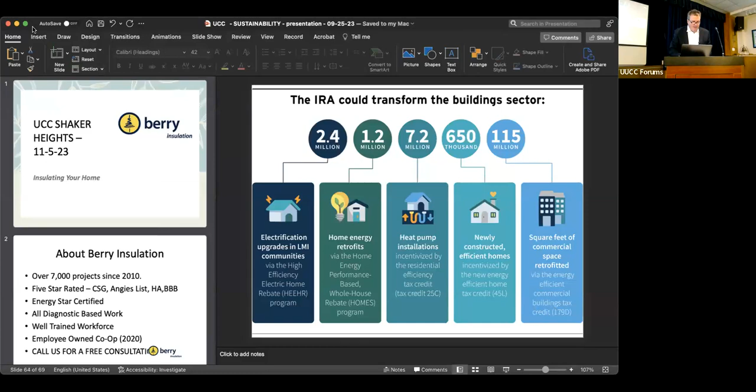So I want to get this to the full screen. Let's see what we can do. Okay. That's right. And I'm very impressed with the technology setup you have here.

So, what I'm going to talk about today is how to keep your home safe, comfortable, and efficient. I'm going to buzz through a number of things you can do in your home to affect your situation, safety, comfort, and efficiency. And then also I'll hit on some areas where you can help defray the cost of energy efficiency improvements, and then Alberto will amplify that, I think, in his presentation. Okay, so write down your questions. There's a lot of content in this subject, and if you have questions about anything we discuss, I have a lot of photos and slides we can review. I would certainly entertain those in the Q&A period or even after.

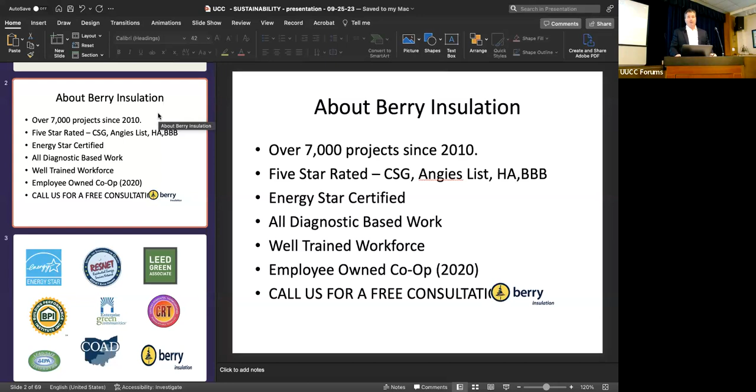Okay, so a little bit about our company. We've done approximately 7,000 projects in our history, anywhere from small improvements to a home up to larger commercial buildings. And as you said, we're involved in a lot of different programs around the area, and we're fairly credentialed. Our men are really well trained. We have certifications in a number of different areas. We're an Energy Star certified company, RESNET certified. There's a lot of credentialing that our folks have, so when they come to someone's house, you're confident that they know what they're doing.

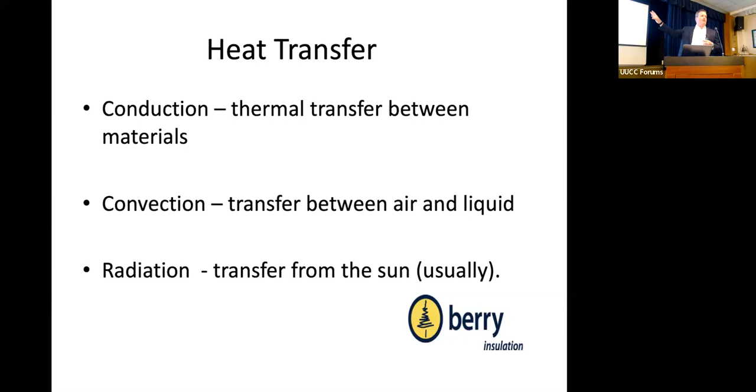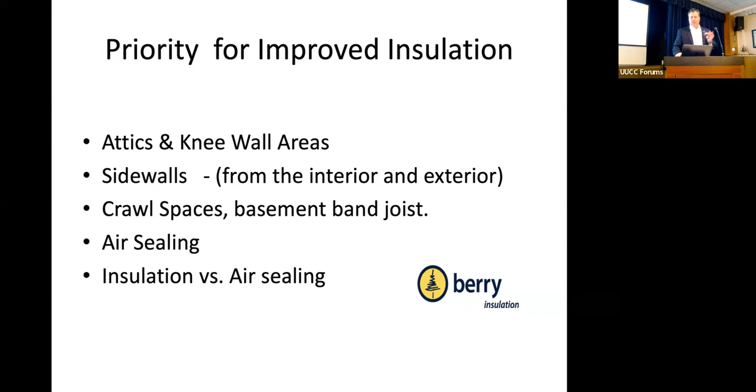People always ask us, well, what can I do to my house? What's the priority? What should I do first? And it all depends, of course, but the common areas for improved insulation in a home are attics and knee walls, which are the areas, well, some photos here in a moment, areas behind walls on your third floor, maybe. Side walls, the exterior walls of the home can be affected through insulation, crawl spaces and basements, and then air sealing. We'll talk about air sealing in a moment. And then we'll talk about what is air sealing versus insulation, okay?

When you walk into a Home Depot or Lowe's or you're getting a remodel done on your house, everyone talks about R value. What's an R value? If you ever go down a Home Depot aisle, you'll see this R19, R13, R40. So R value is a measure of the resistance of any material to the transfer of heat. Very simply, this podium has an R value, that table has an R value, and insulation has an R value. And the higher the R value, the better that material is at stopping the conduction of heat or cold. Okay? So the higher the R value, the better.

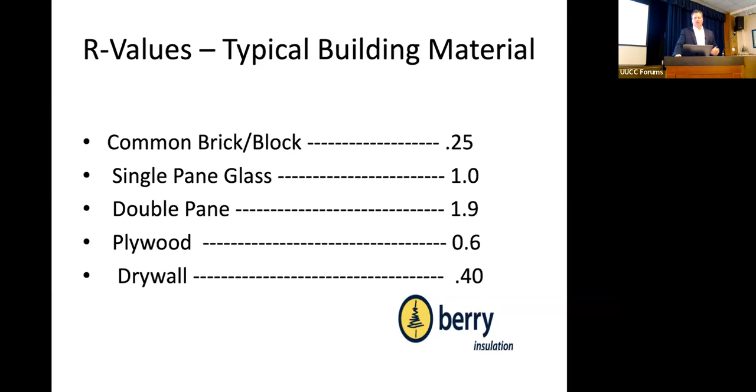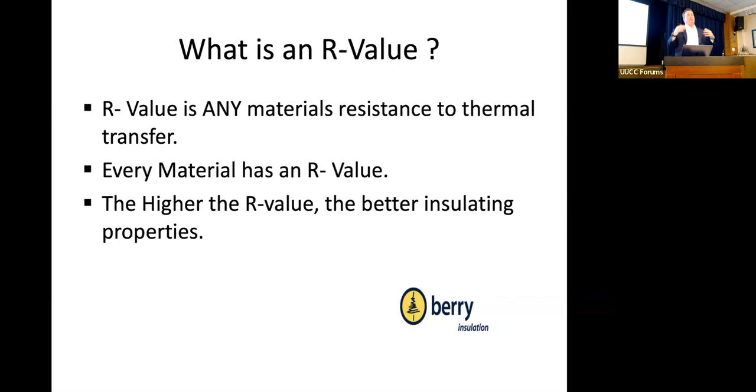So typical R values for building materials: brick, cinder block is very low. It's very poor, a very good conductor of heat, a poor insulator. Single pane glass has an R value of 1 or less, plywood 0.6. And then you get into walls, like wall insulation might have an R value of 13, attic 49. So that's what R value is, okay? Because that always comes up. People call up and say, hey, what R value should I put on my house? So, well, it depends on where it is and what the application is, okay?

Fiberglass has an R value of 3.8 per inch. So if you have 4 inches, it's 3.8 times 4. Cellulose is a similar material. Mineral fiber is a little higher. Foam, which you read a lot about and hear a lot about in advertising, has a very high R value per inch. So that makes it a good insulator. You get more bang per inch with certain types of foam than other materials. But there's also a cost trade-off in those things, okay?

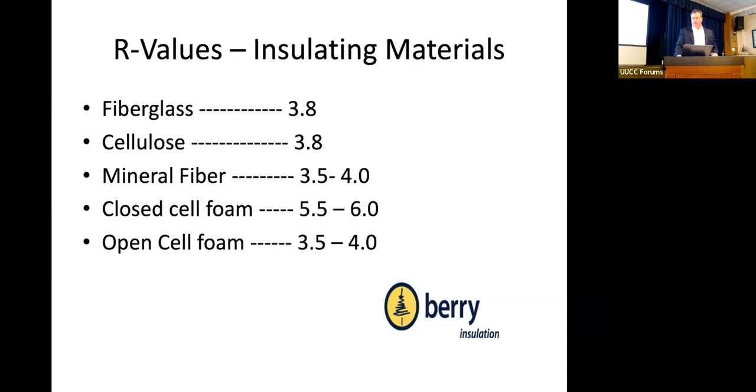So where do you start? When people call, they say, my house is cold, I have ice dams, I have the second floor that's hotter than the first floor, I have a sunroom that I can't use. Where does one begin? And we always like to begin all of our projects with some sort of diagnostic approach.

So that could be as simple as a visual observation up to and including a complete energy audit of your home. Okay? So on the far end of the spectrum, there's something called a HERS rating, which is primarily used in new homes, at least in Ohio. It's called a home energy rating system, where we or someone else could develop a very detailed predictive energy model of your house. So we look at the house and measure the doors, the windows, the walls, the attic, basement, the type of furnace you have, the efficiency of the air conditioner, the lighting, and the appliances.

You put all that together in a fairly sophisticated computerized model, and we can predict what your energy costs are, and we can also predict when certain improvements are made, how much it's going to impact your costs and your efficiency, okay? That's primarily used in new construction when you are making choices about different types of windows, different efficiencies on furnaces and air conditioners, maybe even solar panels. And then what spits out of that also is a number.

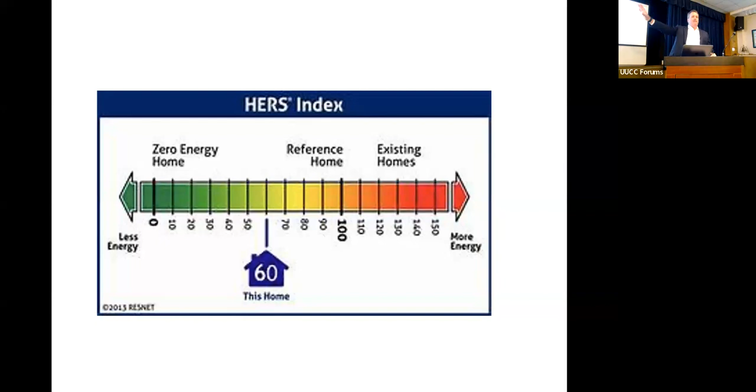There are some states around the country right now, about 8 or 9, Massachusetts, Texas, California, and a few others, that require a HERS index every time a title transfers. So you're providing the consumer with clear information on what the energy costs of that home are. In our state, it's not required except for certain programs where you're getting a rebate perhaps from your utility company, or in the city of Cleveland, every rehab or new home requires a HERS rating for a 15-year tax abatement. So that's the far end of an energy audit. That's more complicated, more expensive.

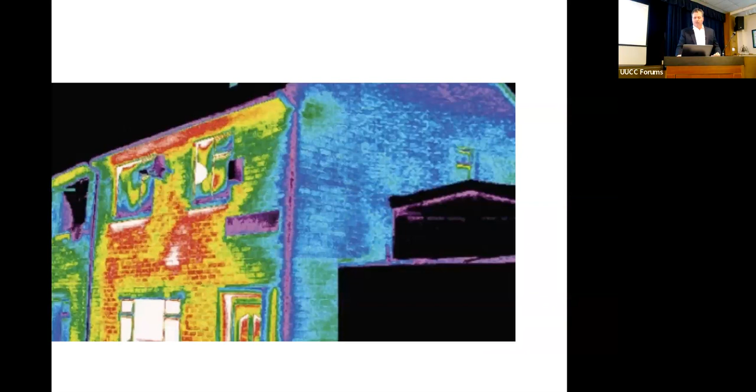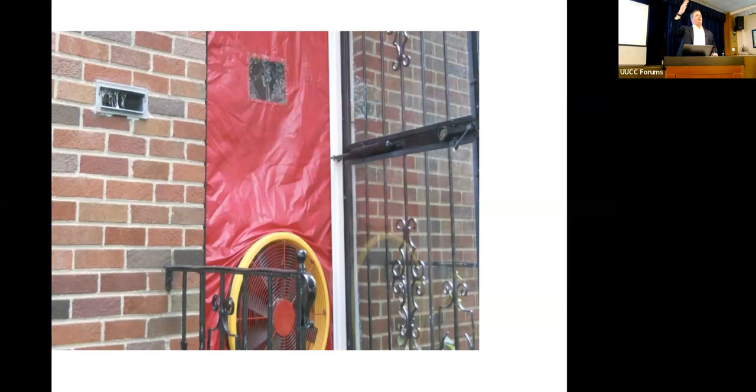We put a little computer, I think I have a photo of that. I'll get to that in a moment. You can put a computer on this fan, and we can measure the cubic feet per minute of leakage in your house. So if this were your house, and we put this fan on the door, we could suck the air out, and the leakier this box is, the more air changes per hour you're going to get. So let's say it's 4,000. And then we can identify areas of air leakage, under-insulated areas, and make improvements. Okay, I'm going to insulate my attic. I'm going to seal up the windows. I'm going to insulate my crawl space.

We can do a post test and demonstrate the reduction of air leakage with an objective number, and quantify that and demonstrate to our customers, which makes us feel good, that the money you spent to make this investment improved your air leakage by 30% or 40%, whatever the case might be. And that reduction of air leakage through this simple diagnostic test has a fairly high correlation with your energy costs. Okay? We've done thousands of these tests. It's not unusual to get a 20, 30, 40, 60% improvement depending on where you start and depending on which measures you implement. So that's a very simple diagnostic test.

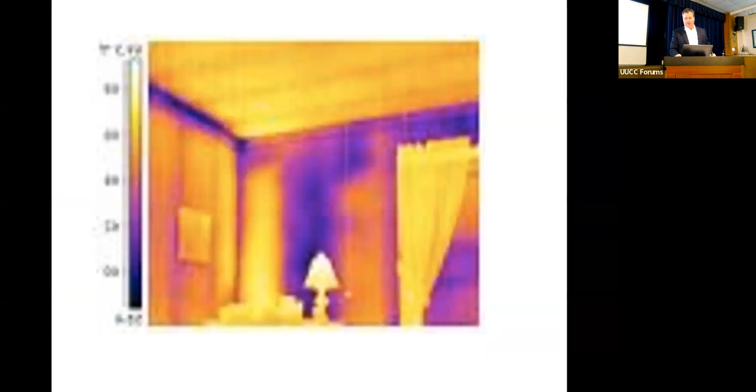Used in conjunction with an infrared camera, usually that's sufficient for most residential homes. And for example, this house, we did an infrared scan when it's under pressure, and we could see the leakages in the sidewall. This house has a whole side of the house that's uninsulated. And we're looking for these elements: air leakage that comes from wind, conduction of heat, and so forth.

In addition to the pressure test and infrared test, we also perform, and we highly recommend, this is the safety part of our business, doing checks for carbon monoxide leaks, natural gas leaks, water intrusion, things like that.

Because when you take an existing home that's been around for a long time, and in Shaker, the homes are very beautiful and also very old, and you dramatically change the air infiltration, you can negatively affect the safety of the home through carbon monoxide backdrafting, improper venting that could lead to mold or reduce indoor air quality. So the safety part is important. Efficiency is great, comfort's great, but safety is equally important.

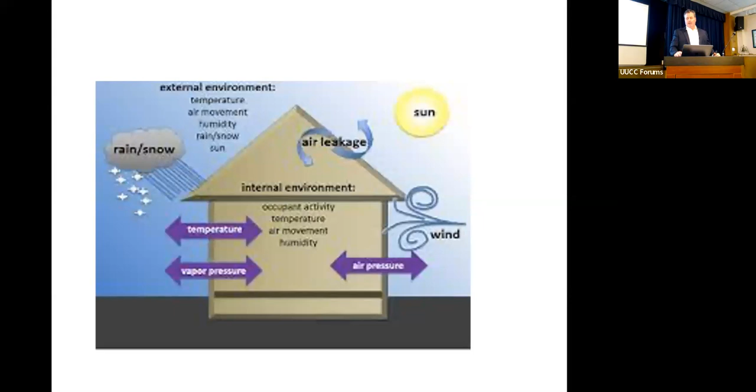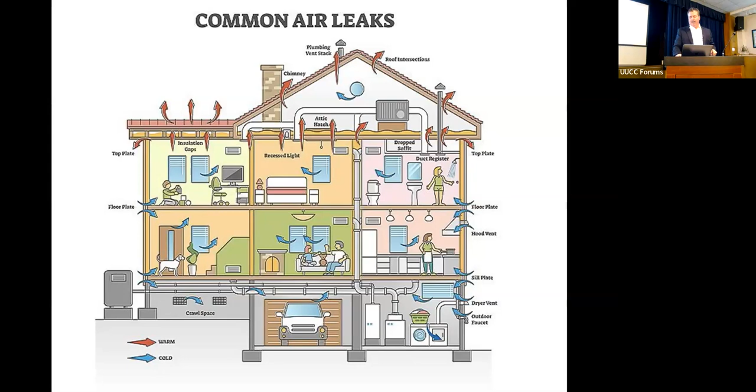And these are some diagrams to show where you get air leakage in your house. So most houses, less so in Shaker, have forced air furnaces that generate pressure in the house, and there's a lot of leakage out of the house. So sealing leaks is the highest priority and lowest cost thing you can do. Caulking windows, doors, blocking leaks in attics, basements, and so forth.

So after you do some basic diagnostics, whether you do the HERS rating on the far end or a pressure test, or even just visual observation, you have to come up with a plan on what makes sense economically and what you can afford and what has a big impact on your home.

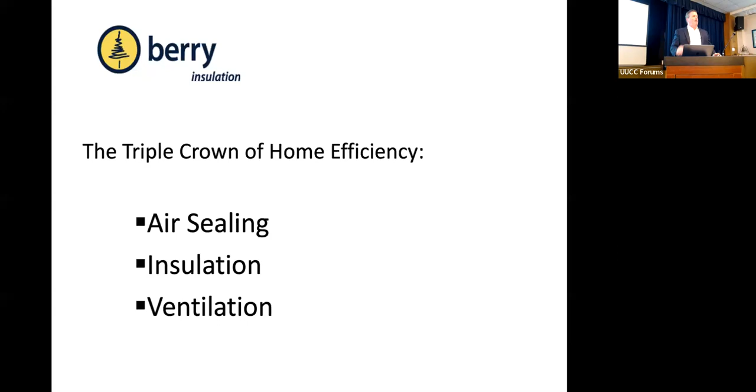And there's three things that if you leave here remembering nothing more, it's these three things that'll affect the safety, comfort, and efficiency of your home. And that's air sealing, insulation, and ventilation. And those three are done in conjunction. You can make some impact on your home to address those areas.

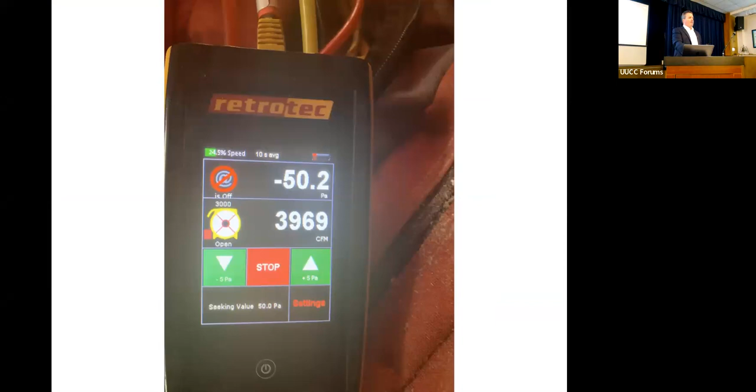If you don't have good ventilation, you end up with this, mold in your attic. If your bath fan's not terminated to the exterior, you can get mold. This slide's a little out of order, but this is a device where we connect to that fan and measure the leakage in the house. So this particular house has a leakage of almost 4,000 cubic feet per minute. And then we do a post test, okay?

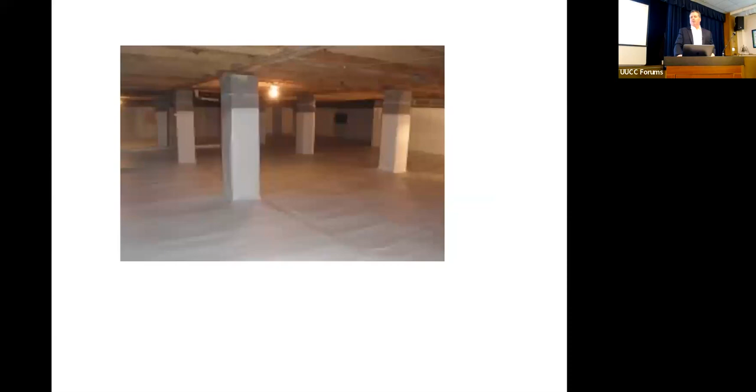Crawl spaces are a problem. Many of the houses in Shaker have crawl spaces. So you can insulate and air seal crawl spaces, basement walls. This is a bath fan that was not terminated to the exterior, and the attic was insulated, and you're pumping steam up in your attic and you get condensation and mold.

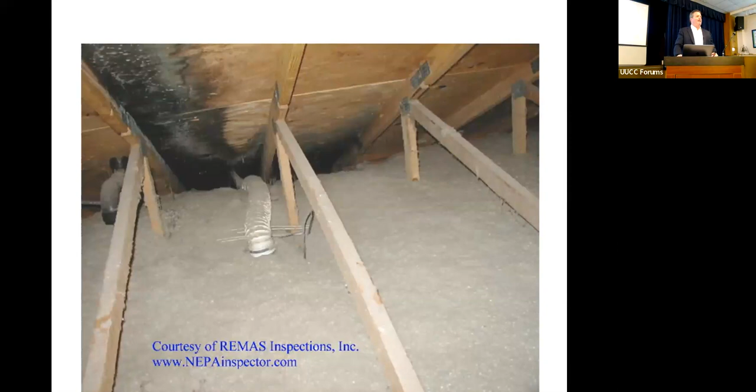And I bet we get 2 or 3 calls a month from people with this condition. Sometimes they don't know about it until the house is being sold, or they go up in the attic and, oh my gosh, I have mold in my attic, and that's not good for health and indoor air quality.

Attic insulation, this looks like it could be a Shaker home. If you go stick your head up in your attic and the insulation is below the rafters, it's probably not enough. If a home were built today in Shaker or in the state of Ohio, the building code requires 14 inches of fiberglass or cellulose in your attic. And very few houses have that unless they've been retrofitted. That code in 2010, it was 6 inches.

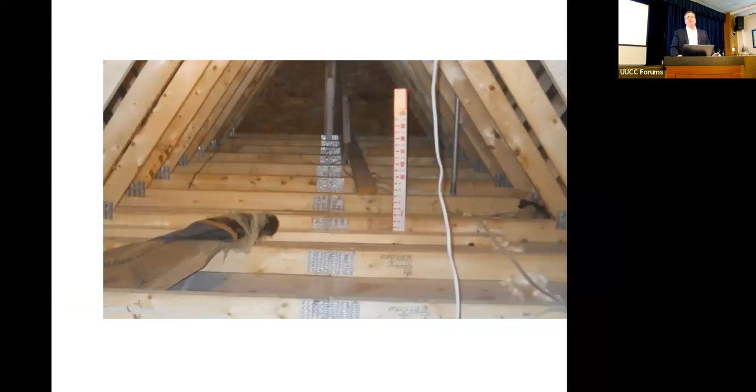Okay, so in your attic, in many cases, you could double, triple, or quadruple the amount of insulation at a relatively low cost. And that's pretty simple to do.

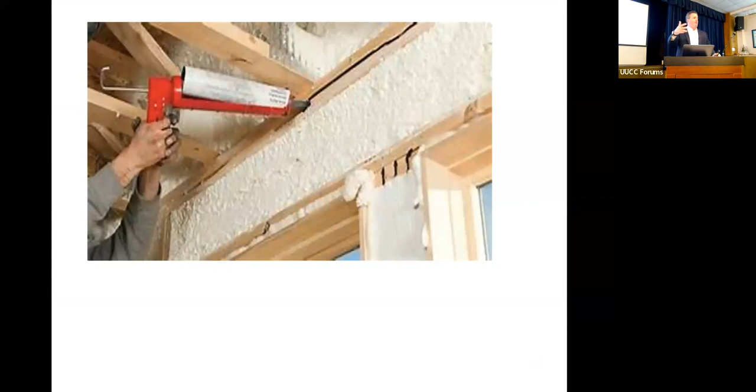Just going to buzz through some photos and let's talk about air sealing. So air sealing is exactly that. Anywhere there's leaks of air from inside to out, that's convective transfer of heat. We talked about conductive. This is convective, where the wind is pushing air into the home, cold air in the winter, hot air in the summer. If you have mice in your home, that's probably a sign you have air leakage. People call us with mice issues, and when we air seal the home for the benefit of improving your efficiency, you also address pest issues too.

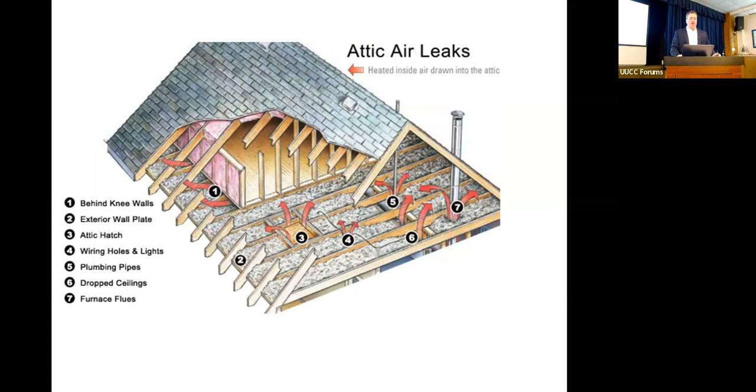These are common air leakages in attics: hatches that are uninsulated, flue pipes from furnaces, can lights, knee walls, all those areas, okay? And this is how you air seal an attic. All these little penetrations get sealed up with foam or caulk, can lights. So that's attic air sealing. And you can also affect the sidewalls of a house.

In Ohio, before 1975, it wasn't required by building code that you have any insulation in your home. So right off the bat, if we see a house that was built before that, we're looking to see if they made any upgrades, and then the codes have evolved since then.

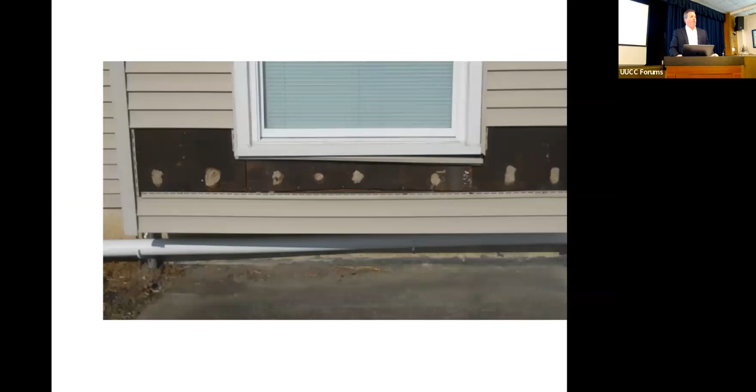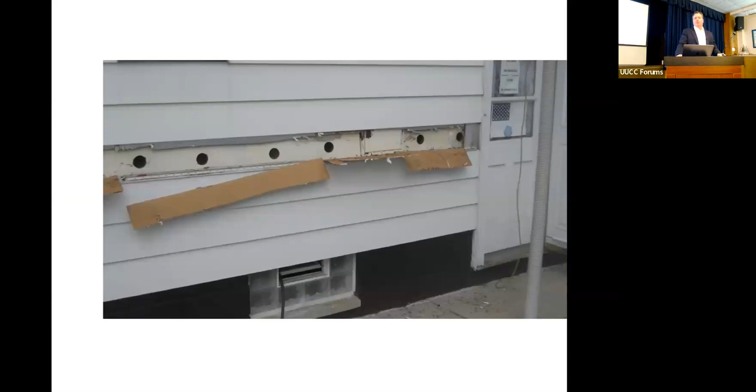So on sidewalls, this is a house with vinyl siding. You just remove the siding, drill holes in each wall cavity, and then fill the holes with insulation. It could be fiberglass or cellulose, depending on your preference or what is called for. And then put the siding back, and you kind of wrap the house in a big blanket.

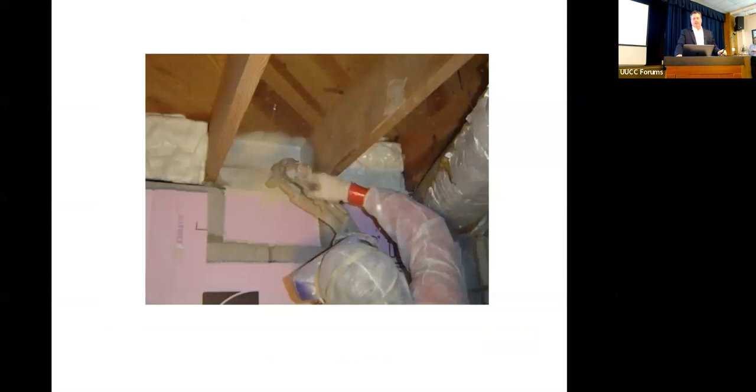It sounds a little invasive, and it's like one of those things, you want to eat the sausage, not see it made. But it can be done in a day or two, and without any damage or long-term effects on your house. If you have a brick house with a wall cavity, you can also drill from the interior, which we do a lot, which is also part of the issue. So sealing up the basement's important. Glass block windows, replacing those are important.

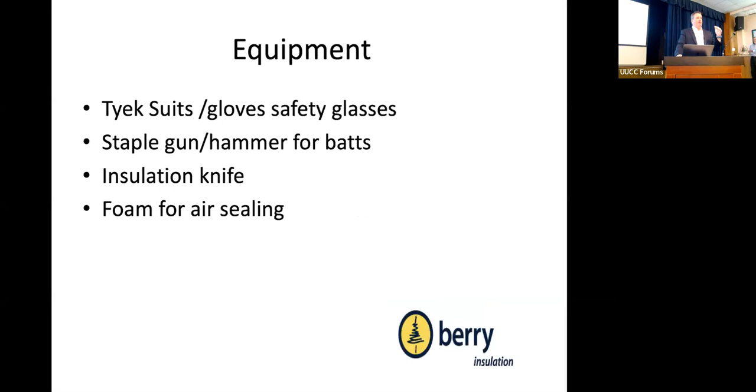And then what Alberto is going to talk about are some ways to pay for this. Dominion Energy has a program that can offer up to $1,250 rebates. There's a federal tax credit. There's some loans that have lower interest, financing for energy improvements, and there's a low-income weatherization program. If you're a senior on fixed income, we're connected with that program in Cuyahoga County.

So that's a quick tour through a fairly complicated subject, and I'll be happy to entertain questions when Alberto is complete with his presentation.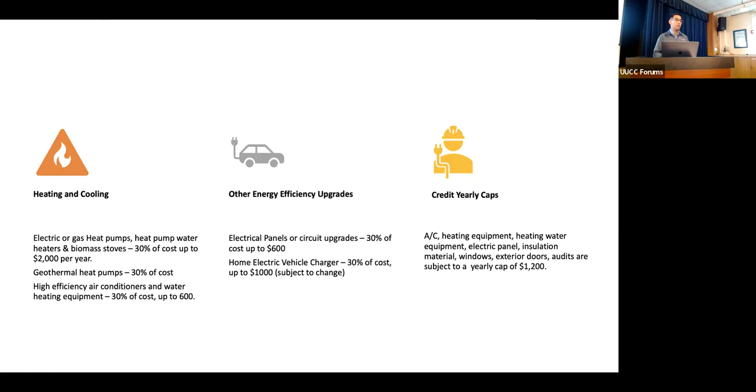And also, as Berry explained, there are programs for senior citizens as well as low income, other ways for it to actually pay up to $14,000 for repairs, which is a nice number if you're looking at heat pumps. A heat pump can run you, depending on your house, from $8,000 up to $20,000 if you want all the bells and whistles on a heat pump.

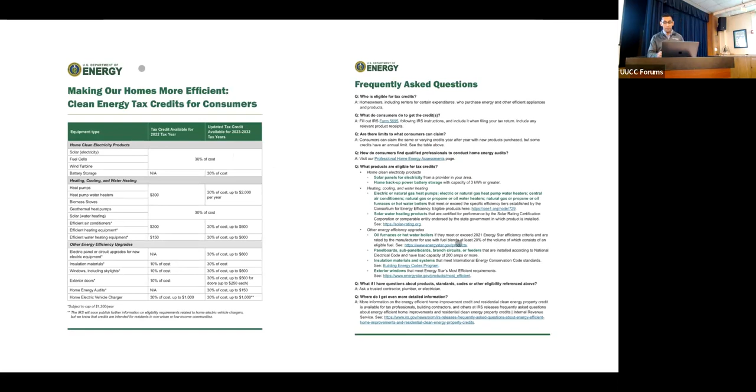So I'm adding this just as a quick little snapshot of what the Department of Energy puts together, and it gives you a quick story, so you'll be able to look at this later on in the reporting, and some common questions in regards to which form to use when you're applying for your tax credit. And you should always speak to your tax consultant. So I've gone over the credits, and I know this is very quick.

In our opinion, with the Shaker Heights Sustainability Energy Subcommittee, you should start from the envelope, right? So caulk around all your windows. And some of these are DIY projects, right? So caulk your windows, your envelopes, any opening penetrations. Install any door sweeps. Myself included, last year I was able to walk through some of my doors and feel the draft, right? So just installing a door sweep could limit that.

Having an 1/8-inch gap below your door provides a similar air intake to your house, or loss of heat, better said, as having a 2.5-inch hole on the side of your house. So just think about it that way. 1/8-inch gap is very little, and you feel it. You feel that cold or the hot. So locate cold and hot rooms.

Shaker specifically has a lot of old homes, as Mr. Berry alluded to, and one of the things that we don't have is proper insulation on these homes. Our duct systems are more of a C channel, and they're using the back of the front of the wall, depending on how you look at it, to complete that duct. And the duct's not insulated, so you're actually heating your facade. If you do a thermal image, you'll see that. And as soon as your AC goes off, you get the cold draft because now you're getting all the cold air. So look at things like that.

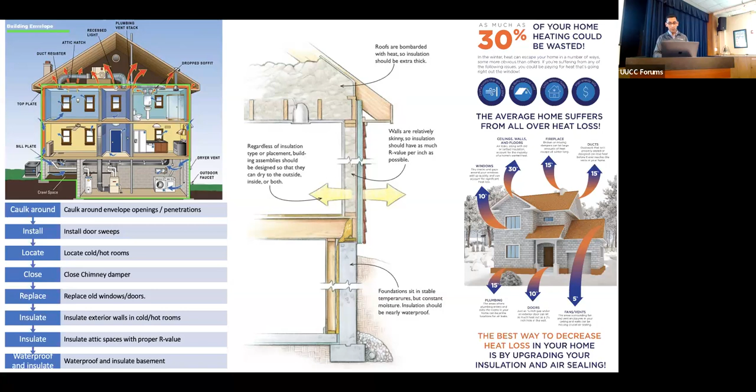So although the IRA provides all these great things, there are a lot of little things that you can do also, right? So in our house, we have installed 13 panels. The optimal place to put your solar panels is the south. That is the optimal; you get full sun the whole day. We have put 13 panels on our west roof, and it has made a huge difference.

Right now, our bill has not gone over $70. You know, and it has gone as low as 10. I paid $10 for electricity where I have, you know, 3 kids and they're home all day, and it's great having that.

Now, there are some misconceptions, right? We don't have enough sun. It's cloudy. This is Cleveland. What are you doing? And the thing that you have to think about is, looking at your parking garage here, you are offsetting most of your energy by doing so. And just today, we walked in here at 8:30 and it's cloudy, and you're still producing around 400 watts per hour on 1 inverter alone, and you have approximately 10 out there. And that's just early in the morning, sun hasn't come out.

So regardless of whether it's sunny or cloudy, you're going to get less production, but you still offset more. So for us in our house, we're offsetting about 60% of our energy with just 13 panels. And just for transparency, with the co-op, and prices may have changed now, it was about $1,000 per panel installed. So that's inverter, everything, the whole setup.

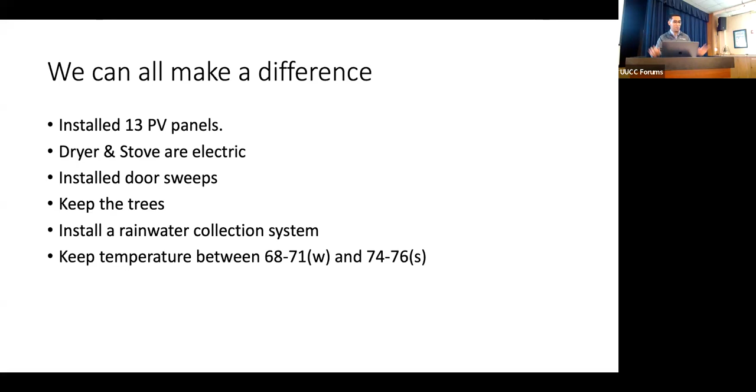And we try to keep our temperatures. So in the winter, keep the temperature at 68 to 71, and in the summer, I keep it between 74 and 76. One of the things that one of my college professors used to say was, in America, we like to turn the thermostat to 78 and walk around in just a t-shirt. It's just the way we do things, right? It's what we're accustomed to. And sometimes, just putting on a sweater and having it at 70, it's okay. But that's preference. And that's my last slide.

I want to thank Alberto Elise and Martin Berry for sharing their time and expertise with us this morning. Before our Q&A, I'd like to say that the UU congregation is cooperating with the Shaker Heights Energy Subcommittee and hoping to engage as many people as possible in taking advantage of the Inflation Reduction Act, or the IRA, getting home energy audits, and implementing the energy efficiency improvements.